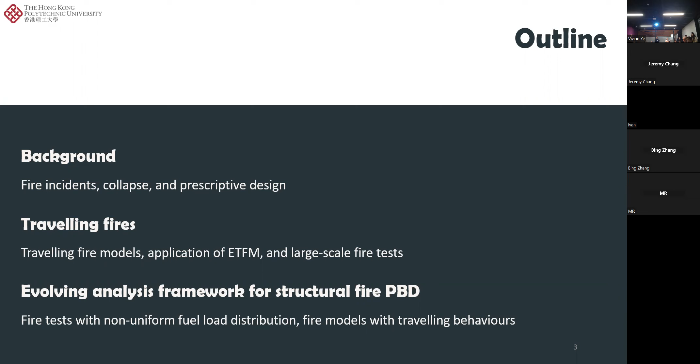So let's talk about why structure fire analysis is important. Although we already know structures may hopefully follow the code and meet the requirement for fire resistance rate, some fire-induced structure collapse still happens and causes disasters.

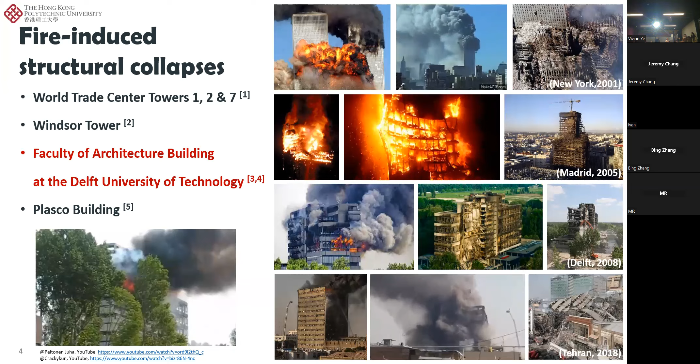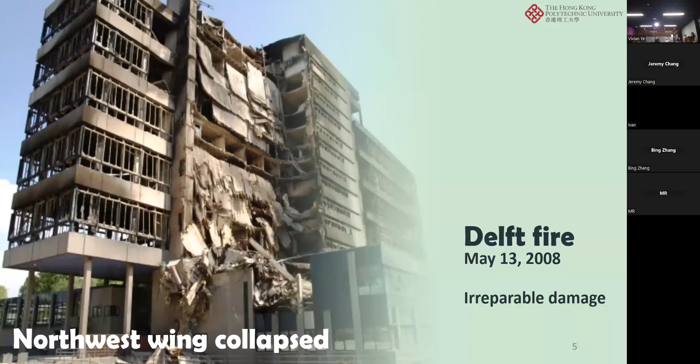For example, the most famous one, the WTC Tower fell down, and the Windsor Tower, and also the Faculty of Architecture building at the Delft University of Technology. The fire was ignited by a coffee machine and burned for hours, then caused partial building collapse. After it collapsed, this building could not be used anymore, so it had to be demolished.

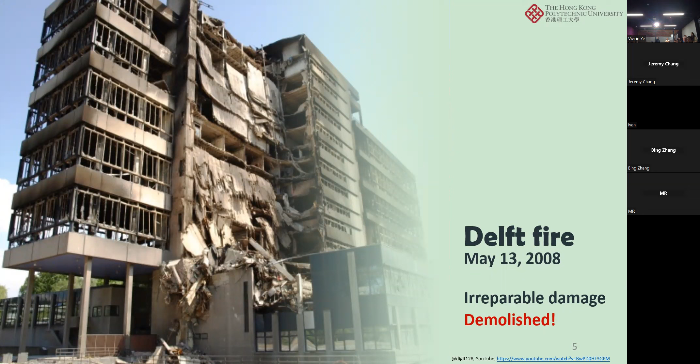We all know fire and structure collapse will cause a lot of deaths, and also buildings like this cannot continue to be used, so it will also cost a lot of loss of money. That's why it's very important that we give more attention to structure fire design.

Let's briefly talk about how we do structure design following code nowadays. In codes, we simply isolate a single structural element, like one beam and one column, and throw it into the standard fire furnace and keep burning and heating it up. Usually we choose load bearing function as the fire resistance rate for the structure elements.

Let's assume we have an entire building, and the beam's fire resistance rate is 2 hours, the column is 3 hours, and we put them to burn the standard elements - okay, standard fire, at least 2 hours. But imagine if we put them together, will this entire building still stand up for 2 hours, or 1 hour, or even just half an hour? It will be quite different, because we're testing a single isolated element, but we want the entire structure to still stand after a huge fire. So how long is enough if we just use the standard fire to test it?

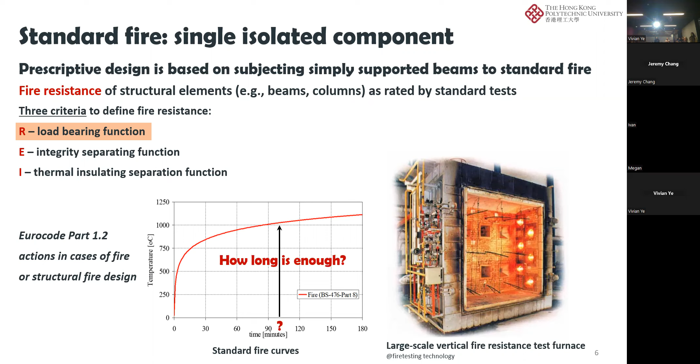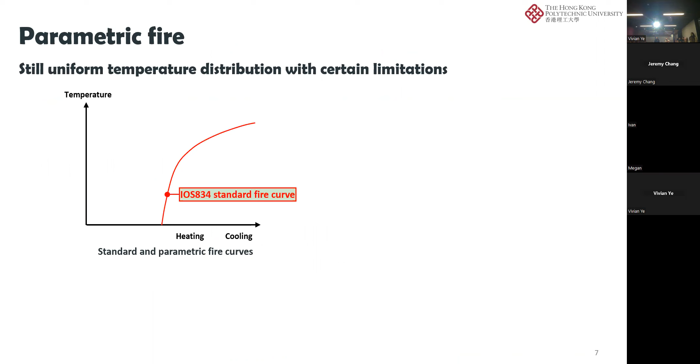And it has some limitations. We know the standard fire is developed due to the furnace, and it just keeps heating - it doesn't care so much about compartment issues, and it doesn't have a cooling phase.

So the parametric fire curves also will be used for the structural fire analysis. And it's already improved a little bit. At least it has a cooling phase, and it will consider the compartment size, opening factors, and the materials used, like the walls, the ceilings. But it still gives a uniform temperature distribution inside the entire compartment, and it can only be applied in small compartments. So it still has certain limitations.

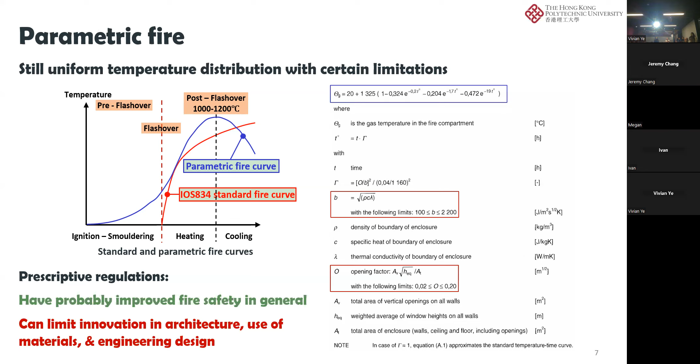If we really want to use this kind of temperature curve in performance-based design with open plan compartments, it looks like not a proper fire scenario to use for the analysis. So how can we improve? What did we learn already from those fires? This kind of standard design doesn't guarantee a safe building environment. It still lets some structures collapse after fire. So we should learn from the disasters. And what are the existing challenges to structural fire safety design?

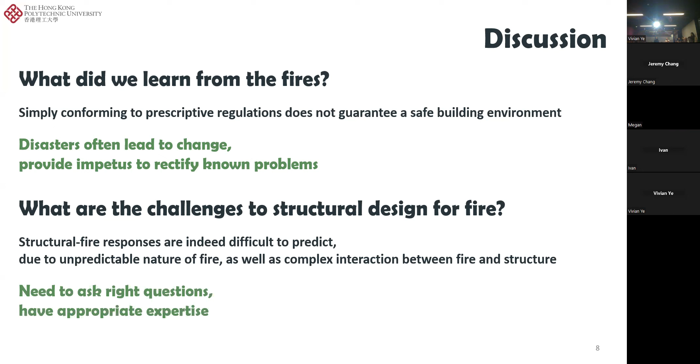As I mentioned, I work for Arup as a structural fire engineer. It's really painful for my work life because a structural fire engineer needs to communicate with structural engineers and with fire engineers, and they don't know each other's background knowledge, and it's very, very hard. In the industry, you can easily find structural engineers with very good knowledge about structural response. And you can find very good fire engineers with expertise in fire dynamics. But as a structural fire engineer, it's very hard. So let's see why it's so hard.

In real projects, when we need to apply performance-based design, it will be landmark projects. It's huge, it has thousands of elements you need to analyze. And the fire is unpredictable, and it's definitely not like a uniform temperature curve. So when they combine together, it makes the analysis extremely hard. Also, as a structural fire engineer, you need to know how to use finite element analysis software, and at least have very basic knowledge about fire models and the thermal properties of structural elements and construction materials. So sometimes it's very hard.

Doing my literature review and my work, I realized there are still some gaps. Even the software we use lacks communication, so it's very hard to use them together. We have already observed fire spreading in real fire incidents causing fire-induced structural collapse, and traveling fire will have an effect on the structures. Traveling fire is basically fire observed traveling across the open plan compartment, causing fire spreading.

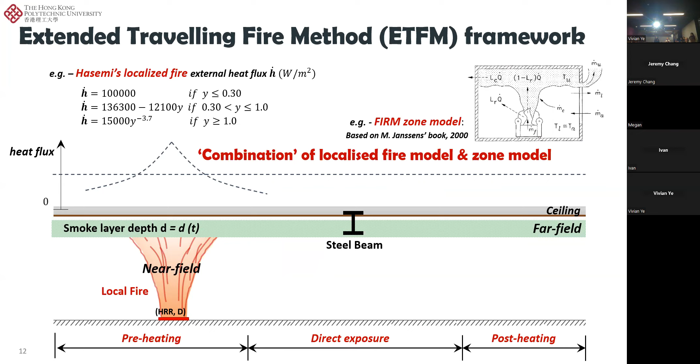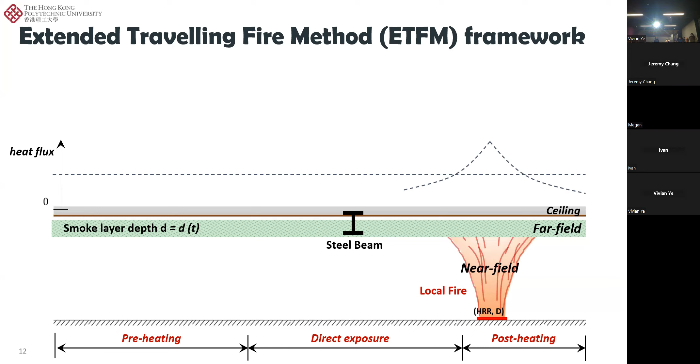Today we will focus on the ETFM framework and discuss how to apply it as a fire scenario for structural fire analysis. This part of the work continues my master's dissertation. So what is the extended traveling fire methodology framework? First, it combines a localized fire model and a zone model and makes the localized model travel. For the near field, we choose the Hasemi localized fire model. For the far field, we choose the FIRM zone model to assume the effect of smoke. Once it starts traveling, a steel beam will experience three different phases: preheating by the far field smoke first, then direct exposure to the fire, and after the fire travels through, it starts cooling. So now we have a very basic concept of the ETFM.

Now I will apply the ETFM, design some traveling fire scenarios, and apply them to a simple 3D structural model for a parametric study, looking at traveling fires with different fire spread rates, fuel load densities, openings, and different structural designs, to see how the structure responds to traveling fire with different key design parameters. We design the compartment this way as a slice of a large compartment. You can imagine this compartment has infinite width, and the fire just travels through these three bays.

And we try observing the fire spreading. So here we can see once we decide the key parameters of traveling fire. So in the ETFM, you have 4 key parameters you need to decide. First is fire spread rate, and also fuel load density, and the HRRPUA, and also inverse opening factor. And all these parameters are relevant to each other.

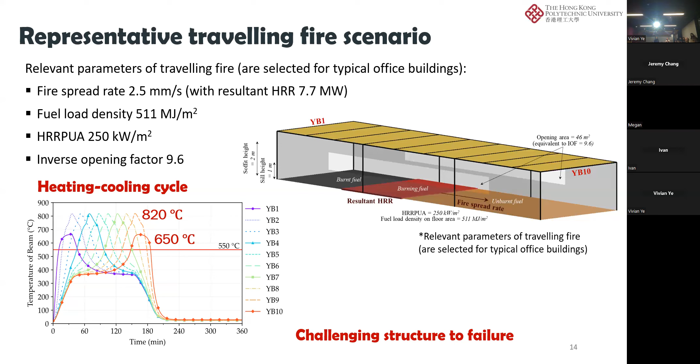And here, this structure has been designed a little bit differently. For the first bay and the third bay, we have a shorter primary beam. The length is 7.5, and in the middle bay, it has the largest primary beam, with a length of 8 meters. So that's why the second bay has the largest deflection during the traveling fire scenarios. This behavior lets us realize the structural response to the traveling fire is not only affected by the traveling fire itself, it's also affected by the structure design, like the layout of structures.

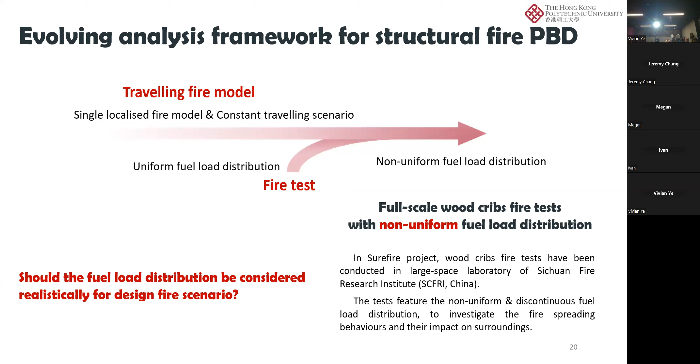So we also conducted full-scale wood crib fire tests with non-uniform fuel load distribution in Sichuan as part of the Surefire project. In this kind of test, we aim to investigate the non-uniform and discontinuous fuel load distribution, to investigate the fire spreading behavior and its impact on the surroundings. So I will just choose one test and show you the observation.

So we ignite the first wood crib, and then, waiting a little bit, it ignites the second one. And you can see here, the difference between the first one and the second one is just the spacing between the wood sticks, and it's already caused different local burning behavior.

For the first one with small spacing, the fire size is small, but the fire duration is longer. But for the second one, the fire burns more intensely, so it has a larger fire size, but the burning duration is shorter. So even with the same fuel load density, a different layout of fuels will also cause different burning.

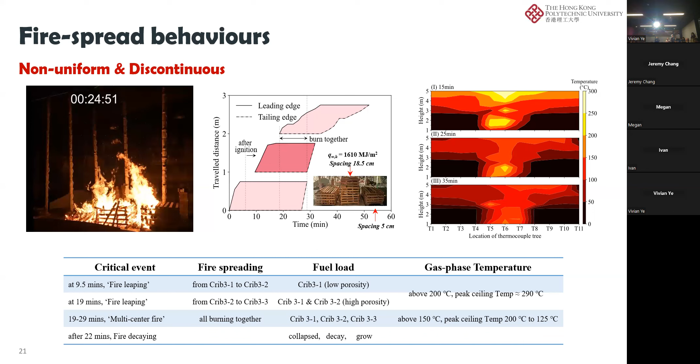And here we can see, unlike the constant traveling fire, if the fire leaps to another fuel load, it will cause multiple centers of fire. It might make the situation worse, because now the fire is also traveling, and you have multiple centers, and one might ignite and affect the others.

So when we consider the load distribution, what will also affect the traveling behavior? The local fuel load density, the porosity of wood cribs in our test, and the gaps between the fuels. For example, if the gap is significantly large, the fire will not ignite the next fuel. And how it affects the traveling fire behavior: it will have a different fire size and a different duration of localized burning. And for the disconnected fuels, it will ignite with time.

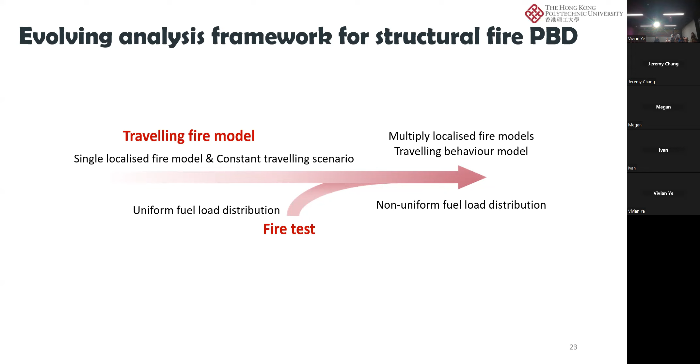So these are very complex behaviors. It's very hard to summarize them well with some physical mechanism, and they will also cause unknown failure. So here, we need to develop the traveling fire models a little bit. We should consider the localized fire burning, and we should also include the traveling behavior models in the traveling fire models. Then we can describe and represent the traveling behavior better.

So let's review a little bit. First, we tried to use the time-temperature curve to do the structural fire analysis, but it's just suitable for small compartments, and it just gives a uniform temperature distribution. Then we improved a little bit. We tried to include the localized fire model and the traveling fire model in performance-based design, but there are still certain limitations.

So for the future, to do better performance-based structural fire design, we could establish a design fire scenario library, represent the real fire development, consider the local damage, and include the heating and cooling effects induced by traveling fire.

So here we developed a new function in OpenSees. I will not call it a new traveling fire model, but it's a new function. We include different localized fire models like the Alpert ceiling jet localized fire model, the Hasemi localized fire model, and also the localized flashover for different kinds of localized burning behavior. And we use different fire sizes and fire spread rates to represent the traveling behavior. But how can we achieve the traveling behavior?

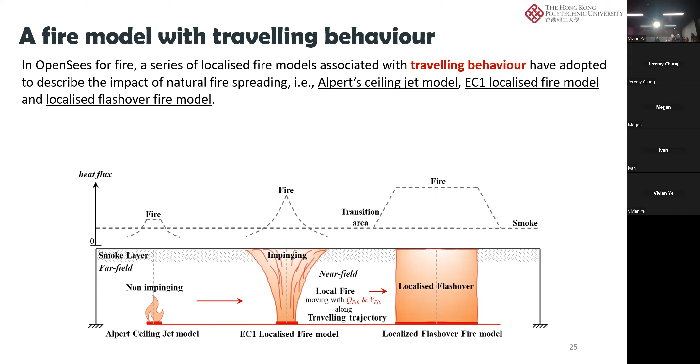We use an external file in OpenSees. We already developed the natural fire model. If you want to input your own fire parameters, you need to use the fire parameters file. It includes different columns, and you can input everything you want here, so we can represent the parameters with different behavior as time changes.

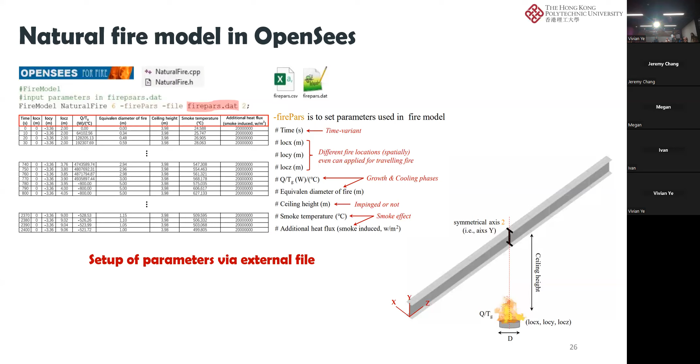In the first column, we put the time we want for the fire scenarios, and then we choose the different fire locations. If you want it to go through a certain route, you can determine different locations. You can also determine different fire sizes, fire diameters, ceiling height, and the smoke effect. For all the details of the parameters and how to use them, you can go through my paper. I will not explain in detail here; I just want to let you know you can use this model.

And the amazing thing is we can directly use the natural fire model to generate as many design fire scenarios as you want in OpenSees. We also have GiD plus OpenSees as the finite element structural model, use the thermocouple function developed in GiD, and combine the design fire scenarios with the structural fire analysis. And we can even get displacement and gas temperature as key parameters to build a database we might use later for AI training.

So I think at this part you might already be getting confused, because suddenly I start to tell you, okay, we have amazing software, we can do everything at once. Yeah, I think it's very painful for structural fire engineers to do all the simulation. You might need a lot of Excel to get the gas temperature as a fire boundary you want to put into the structural software to do the thermomechanical analysis.

But structural software like Abaqus and ANSYS is sometimes too powerful. They are not designed on purpose for structural fire analysis, and it's very hard. You need to manually input every fire parameter and every fire boundary for the structures, and it's very painful. But now we have GiD plus OpenSees as a user interface, and we developed this thermocouple. I will just simply explain why it's called thermocouple.

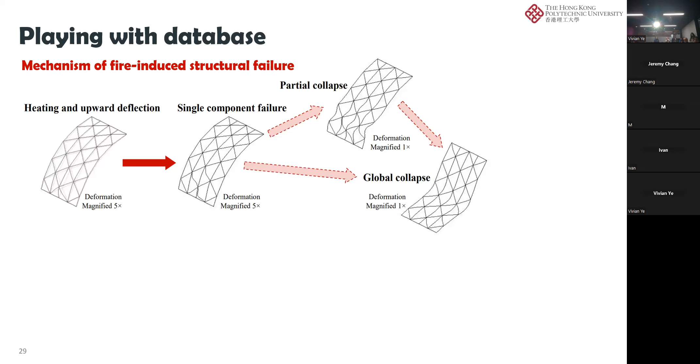But sometimes the global collapse of the entire building just directly happens without a partial collapse first. As we can see here, if we put the localized fire in the lower part, the global collapse will suddenly happen with no signs in advance, like a partial collapse. It will cause much more risk for us to predict the global collapse, and it will give no time for firefighters to evacuate from the building before it collapses. So this is a finding after doing the analysis for all the scenarios.

And this is a good start, and we want to continue doing more analysis with different, like more travelling fire scenarios, and see the difference. And also, as we mentioned, we use the database to do rapid forecasting of structural collapse in fire. And here we choose LSTM as the machine learning training model.

I will not go through in detail how we choose and design the architecture and layout of the machine learning model. I just want to show you why it's important that we do the simulation and have a doable framework for getting the database.

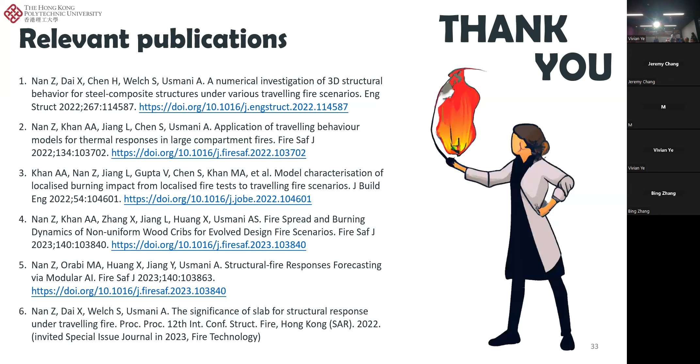I've got two questions. It seems like this is for unprotected steel or unprotected metals, is that a correct assumption? You mean like this framework? Yes, you can simply add the fire protection. We'll also develop the fire protection material in GiD, in OpenSees, and you just input it. It could then do the analysis for steel structures with fire protection.

Right, so I'm not exactly sure how your AI model works. I'm not even sure if anyone really understands all the nitty-gritty apart from input and output. So for the AI response, you would need to tell it, okay, I've got this steel structure, laid out with my members in this way, and each member has this amount of protection. Currently, have you trained it to look at different protection thicknesses as well?

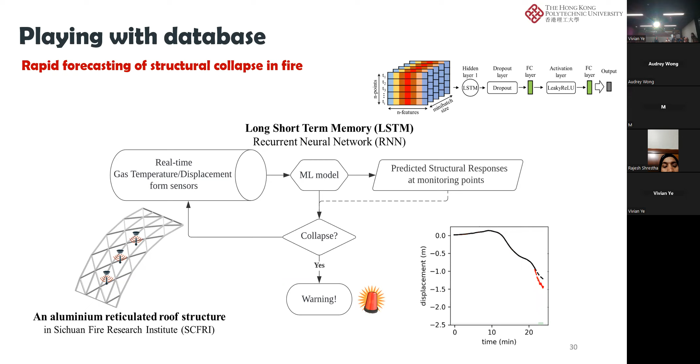Yes. So for the AI training, I'll go a little bit further. The database input is the gas temperature from the fire, and also the displacement from some key points, like this connection part. This is all the input for the training as a database. So that means when you're doing the prediction, you also need to get some gas temperature from fire, and also need some displacement in real time as a feed to do the prediction.

The output of the prediction is the displacement of, like, one connection. So the output is just the future displacement, and the input is real-time gas temperature and displacement. We also need to give some standards to determine whether the structure collapses or not. So we use 0.5 meters as a standard. If this connecting point falls down 0.5 meters, it could be determined as failure. And if three points reach this, we say the entire global structure has failed.

This is a bit confusing sometimes when we talk about input and output for a machine learning model. Most people will just think we get the real-time gas temperature, the real-time fire scenario, and that it's enough as input for the machine learning model to do the structure fire prediction. But as we know, structure response is very complex, and it's relevant to the structure itself, like different materials, different sections, and everything. So it's very important that we put some information from the structure to correct the prediction of the machine learning model.

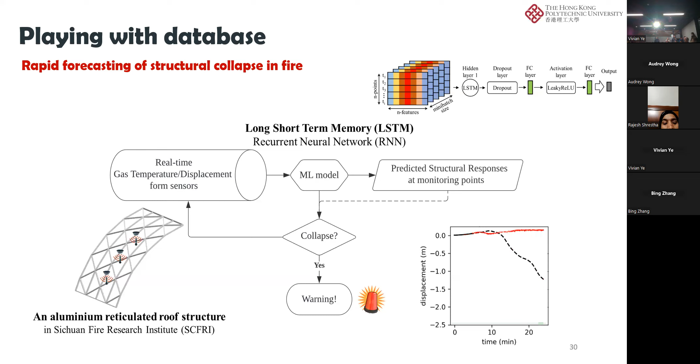Okay, thank you very much for that. My second question, because I'm not personally used to this, if you go a little bit forward - I think this is your summary slide, with the animation on the bottom right - that seems a bit dynamic to me.

Yeah, we use dynamic analysis, dynamic in-plane analysis for this. So you don't just ignore it after it falls down, it still has damping because of the simulation - it's not a real structure response. The real structure response would need to cut off after it falls down the first time. But since we use dynamic analysis, it pushes the simulation to keep running continually, and it will show some damping just because of the numerical simulation.

So that animation starts right before you reach your failure time, is it? Yeah, I see, I need to update this animation - it will stop after the first fall down, at that moment it should be stopped. I'm sorry, I must have misunderstood, because it seemed to me like it started initially and then suddenly with temperature it just falls down, but thanks for clarifying that.

Thank you very much, Tom. No worries, thank you, and great presentation.

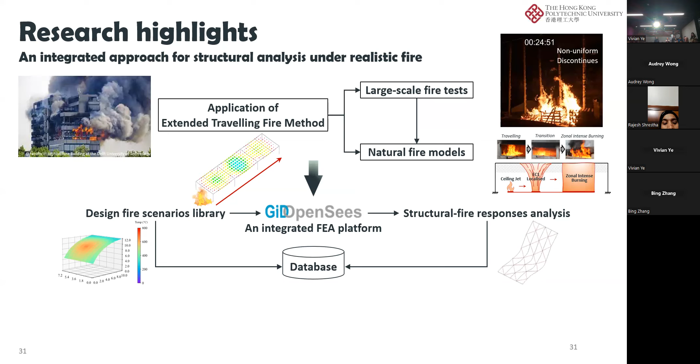Okay, you mean this - yeah, I think it's called the x-ONE compartment experiment. Oh, it's not right, in Sichuan? Oh okay, x-ONE, x-TWO, it's also conducted by Professor Guillermo Rein's team, conducted in Spain. And even recently they have a large scale fire experiment called CodeRed, with timber ceilings, and the fire size could reach hundreds of megawatts. So we can always observe something unexpected in traveling fire.

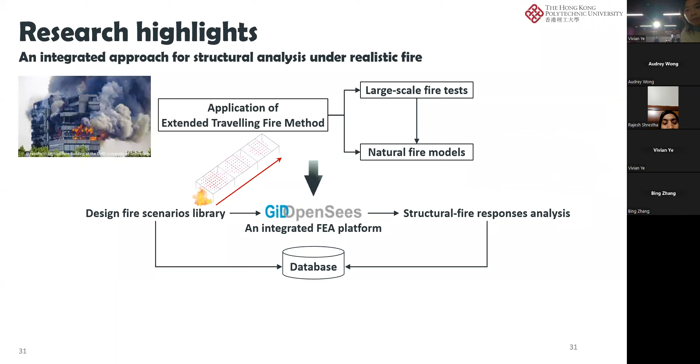I think we can go back to this part - so there are a lot of different fire tests in the past 10 years. You can see even four of them are designed very similarly: the Edinburgh Tall Building Fire Test, the Malveira test, and the GFT test. They are quite similar but just change the fuel load density, and you'll see all the traveling fire scenarios change - the fire behaviors change. Compared to others, there might be a different fuel load density, different compartment size.

So we conduct large scale fire tests to simulate more real fire scenarios and get more sense about the fire behaviors, and all the recorded data could help improve the traveling fire model. That's why they spend money to do a lot of large scale fire tests, trying to summarize all the data together and see how the fire behaviors could be summarized with simple equations we can use.

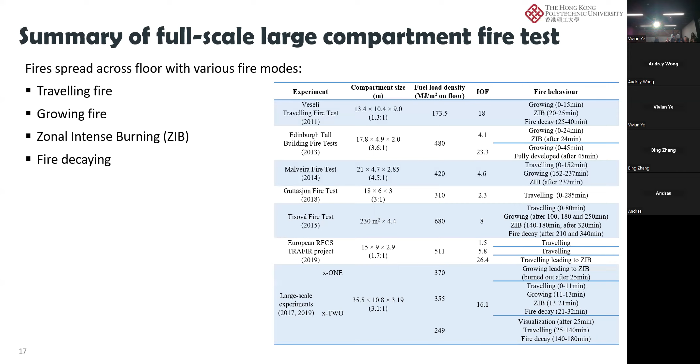Yeah, because you said standard fire curves are overly conservative, but you want to design it. Yes, so overly conservative is not a good design. Sometimes we heat it immediately, and of course the structural members will immediately fail. But after we design, we need to do recalculation again, simulation again.

So we need to consider the fire protection, and the fire protection will stop the heat transfer inside the structural members a lot. Then it will totally change the thermal response and the structural response. And then it's hard to see whether we really need to consider this kind of fire scenario, or whether this kind of fire scenario really follows the compartment size, or it cannot be used everywhere.

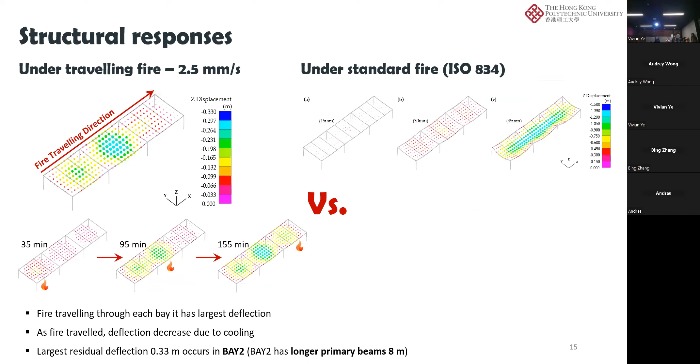Where's that transition point? So the transition point, I remember, for the compartment fire, the parametric fire, just here. So it's already defined very well in the Eurocode. It gives you a lot of limitations. If I remember correctly, for the parametric compartment fire, the compartment size should be less than 500 square meters. Okay. Yeah, so it's not suitable for open plan compartments anymore.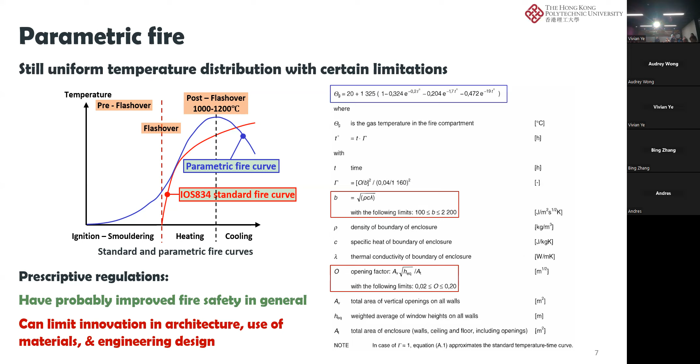But as we discussed a lot of times, in small compartments, we don't need a travelling fire. And in open plan compartments, we cannot apply a parametric fire. That's why we need to consider all the fire scenarios, and we need to design it very well to suit different scenarios. Also, you can show where you have a relationship with the velocity. Oh yeah. That will define which one is better.

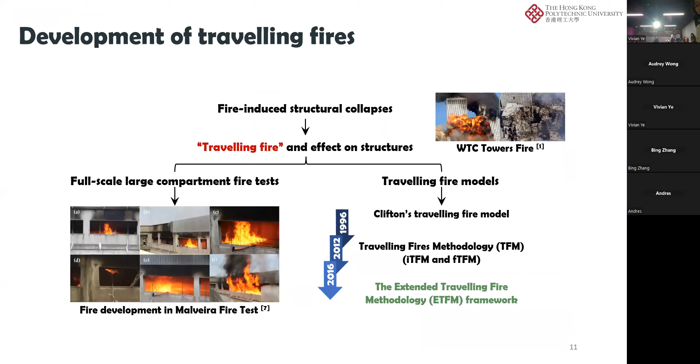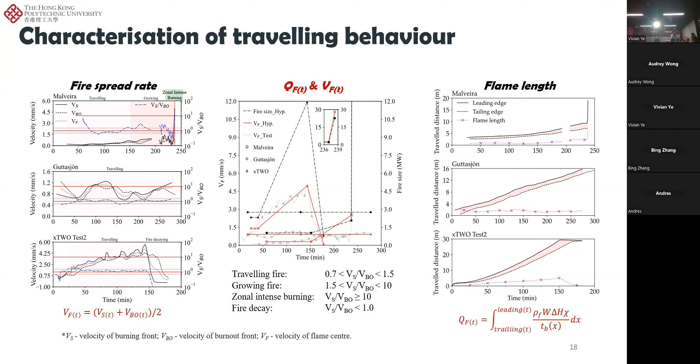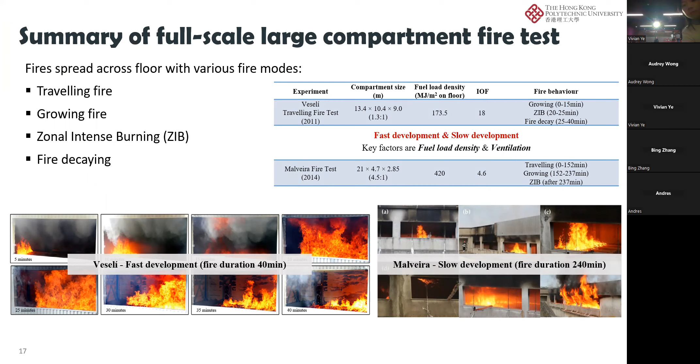And we can only consider 2D structures? No, structures are always 3D structures. Let's show here, maybe. So these kinds of structures we always design as 3D structures, and only for the beam we use 2D beams. 2D beams means we're doing just 2D sectional heat transfer, and in the length direction, we just calculate based on the relationship.

And for the 2D elements, we don't use 3D solid finite elements to do the analysis. If we try to use 3D, even in the 2D section of the beam, the heat transfer will go from one mesh of the I-beam to another mesh and to another mesh, and that's called 3D heat transfer inside the beam. But we don't really need that specifically for structural fire global analysis. So we just simply choose the 2D elements.

It means this element is a line. You need to define the start point and the end point, and then you need to decide the I section or H section and the section you want. Then it will generate the entire beam. It's not like 3D solid elements with a lot of small mesh, where you can do the finite element and the heat transfer inside the structural elements. So that's why it's called 2D elements. It's not like the entire structure is 2D.

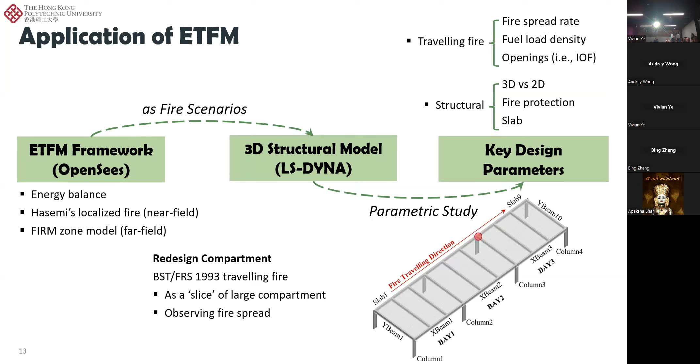Back to this example where the animated picture was there. If you do all your calculations and reach this conclusion, what are you gonna say to the client? How are you gonna advise them what to do? Let's go back to here, okay? So, you reach this point, then yeah.

So after doing the entire analysis, what I suggest to my client: the codes will require you to protect all the elements. It costs a lot, right? But after doing all the analysis, we will find out only this kind of part, when the fire happens, will cause the fall down. Even here, it's with very high ceiling heights. Even if the fire has 40 megawatts, it will not cause a significant effect to the ceiling. So I will just suggest to my client, maybe just protecting part of the roof is safe enough.

And it will be a more cost-saving design, and it will reduce the construction cost. You just need to put fire protection here. Selected members to be protected. Yes. And that is the cost saving. Because we already did the analysis and we proved, if the simulation is perfect, there's no error and it's good enough, we can tell clients, you just protect some important parts. You don't need to exactly follow the code and protect all the elements.

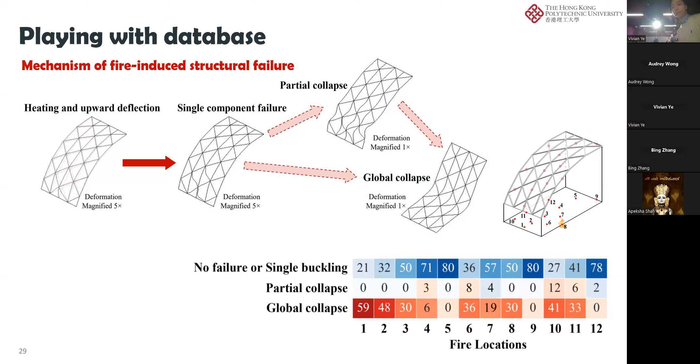I chose it as a very simple example to do the simulation. But if it's a real structure, the clients will ask us to do the simulation for this kind of structure. This Istanbul airport is the biggest airport in the world now, and it has a lot of complex structural design inside. Once the fire happens, if one part of the roof falls down, it needs to stop. It cannot do business anymore, and it will be a lot of loss. So business loss. Business loss, and of course, you can imagine how many passengers are inside the airport. If the roof suddenly falls down, a lot of people are going to die also. You wouldn't expect people to be there when the fire is raging, everyone is out.

But the question is, would your decision be different if that was a floor in a hospital? Would your advice be different? Like the hospital, we might not really do the performance-based design. We exactly follow some rules. Some parts we could do performance-based design, just trying to save some construction money, but particularly a hospital and the important parts, not like the commercial building or residential building, we'll just maybe follow the code. It may still save your money.